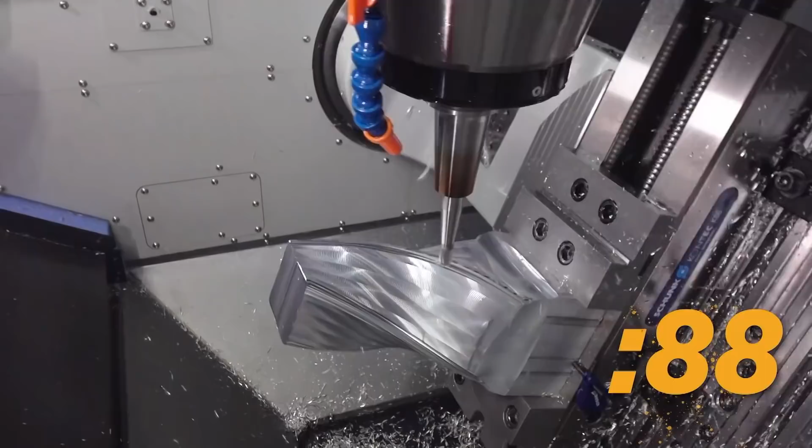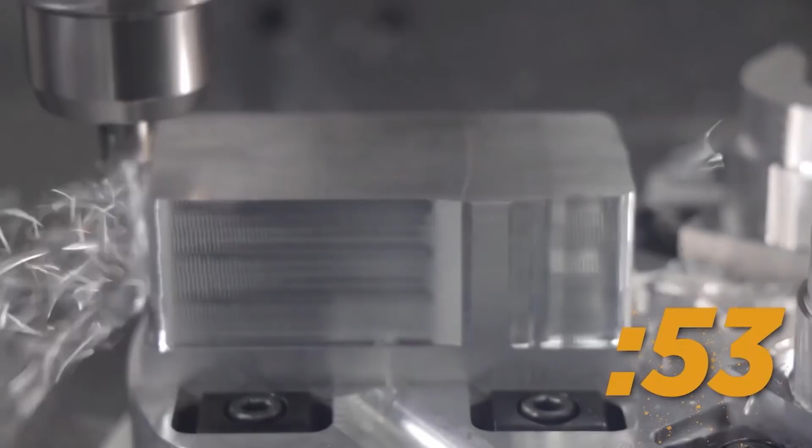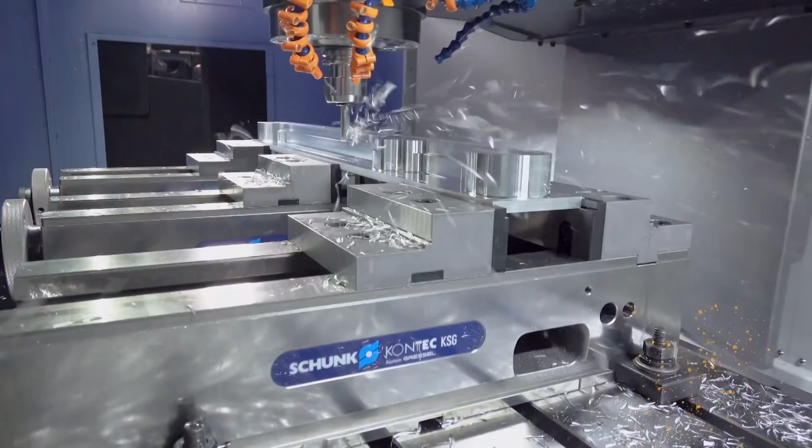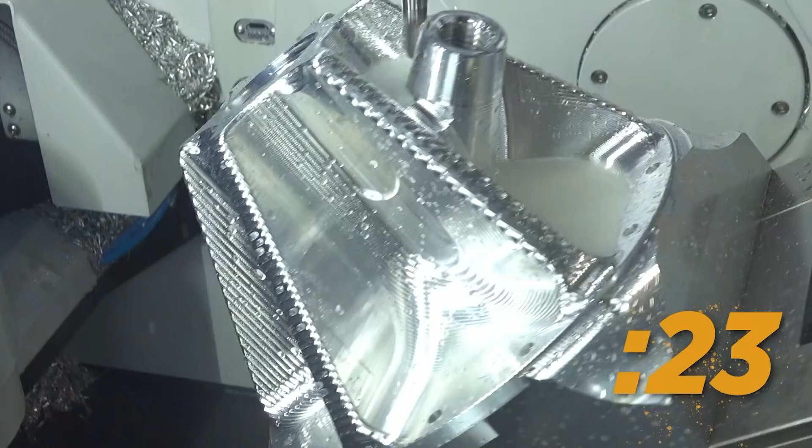Right here in Flower Mound, Texas, baby. Oh man, oh man. Boombastic. It's gonna be insane, all right? Woo! How's that cut? Boom. Had to go beast mode, right? Woohoo! It is Christmas. Beautiful. Crazy, right? Crazy, right? Beautiful. Crazy CNC machining. Crazy deal. Boom.

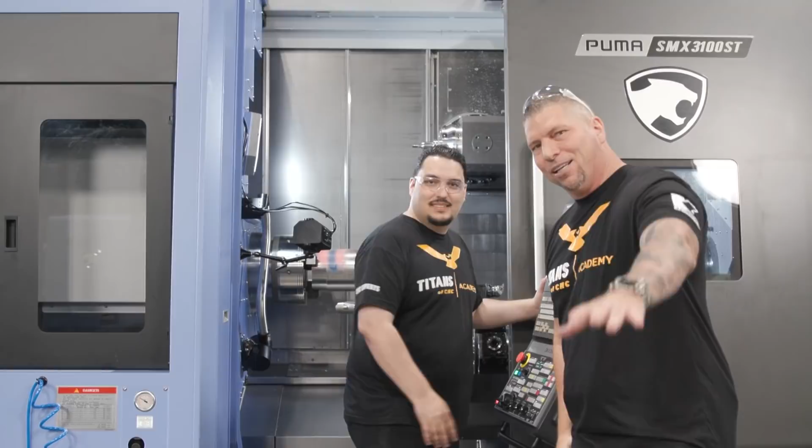What's up, everybody? My name is Titan Gilroy, and I'm excited to introduce you guys to BOOMBASTIC 2021. It's going to be an incredible show. Over the next 3 days, we're going to have 6 unique episodes, and we're going to have some crazy machining. Right here, we're standing in front of a big old mill turn. I got my son Tyson right here. Say hi to everybody. Hey, what's up? Boom. And Tyson is going to start off with that machining, and of course we're going big.

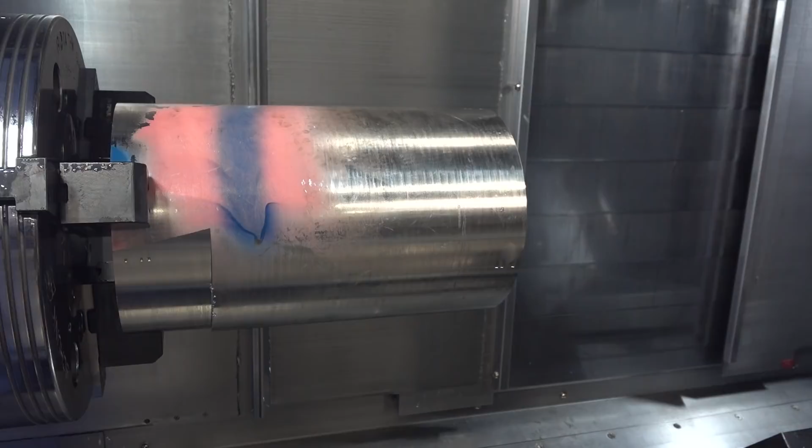We got a 140-pound piece of 316 stainless. We're going to take some big old drill. We're going to take it right through that material. We're going to pinch turn it, and we're going to create an amazing part on this machine, right? We got to go big in Texas, and guess what? We also have some amazing guests, leaders in this industry that's going to help take your skills to a whole nother level.

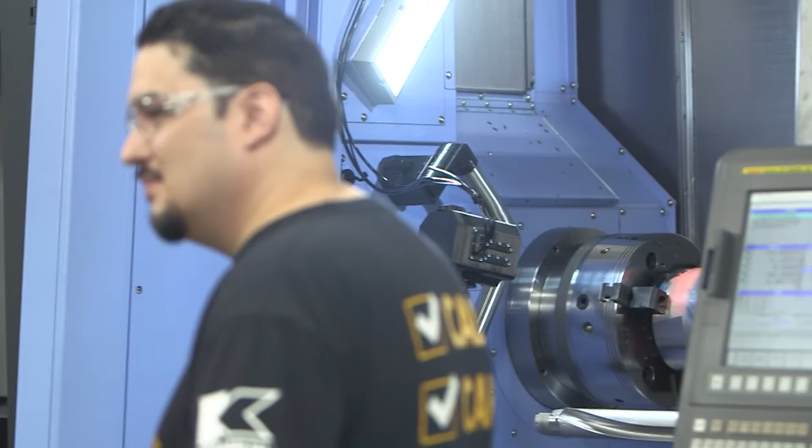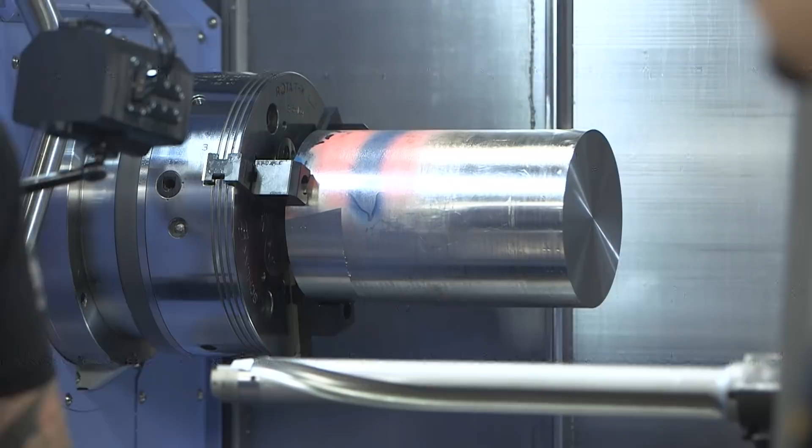And I'm gonna have a guest coming in to actually help us explain a little bit about the machine before we start actually machining. But stay tuned, because you see that drill right here? For context, look at my hand right here. That drill is about to go through that material right after we get done giving you the specs on the machine and talking about how brilliant this thing is. It's gonna be incredible, all right? So Tyson, I'll let you know when we're ready to go. All right. Oh, a little bit of pressure, a little bit of pressure.

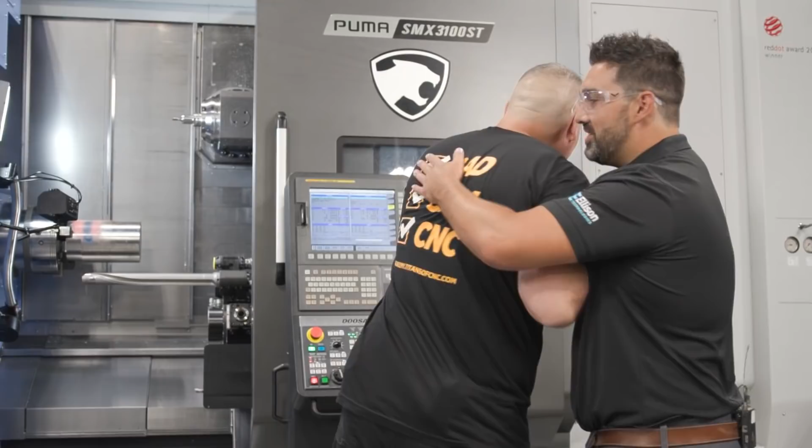All right, and you guys know from the last Boombastic, Mr. Chris Wood. What's up, brother? Hey, mate, how's it going? Good, man, good, good. Thanks for coming. Thanks for having me. Absolutely. So, brought in the expert over here on multi-axis, crazy 5-axis, 9-axis, you know it all, right? Well, not all, Titan, not all.

But no, honestly, today, this is a great machine, and you've talked about it, and the concept of done in one, removing the setups and removing the non-value-add labor from those setups, from those jobs. This type of platform is how you can do it. Cool. So you're solving problems for everybody out there.

Exactly. You talked about 9-axis, right? Everybody hears 3-axis mill, 2-axis lathe, maybe a 4-axis horizontal with the B-axis on there. Maybe then looking at 5-axis machines that we're going to talk about tomorrow and Thursday, right? But what makes it 9-axis? And then how on earth do you even program a 9-axis machine?

And shout out to Titan for doing that, because crazy. I can't do that. A little bit of pressure. No, just a little bit, right? Yeah, yeah. But anyway, let's just talk about the machine for a second here. Oh, just gonna jump in.

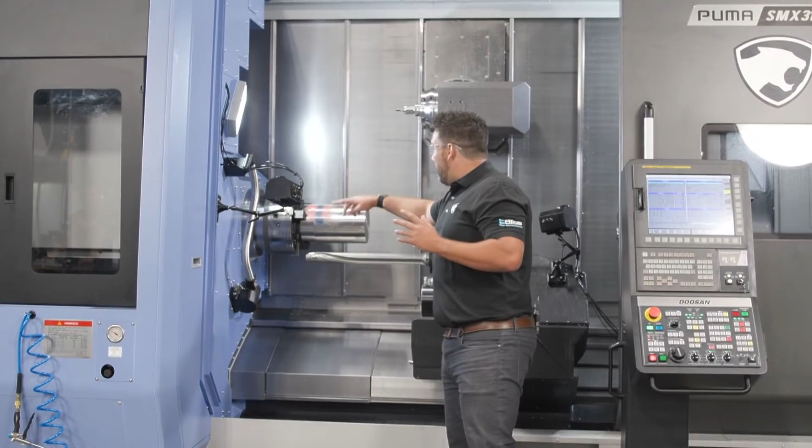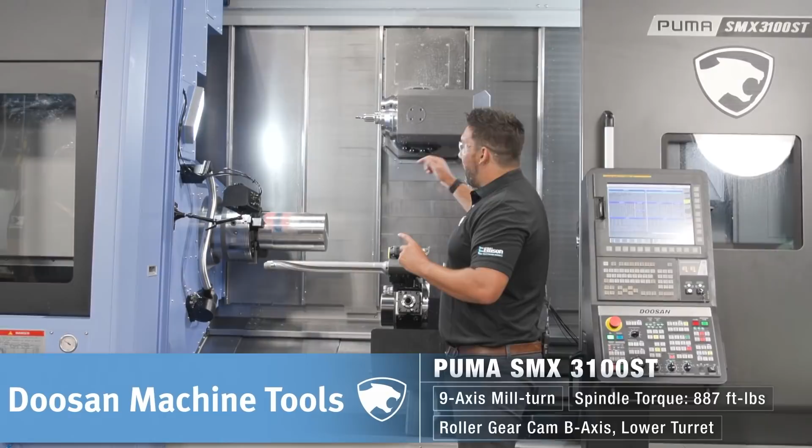So, as we're looking over here, we got a lathe spindle, okay? Regular C-axis lathe spindle, but 40 horsepower, 3,000 RPM, very powerful spindle. We've got another one on the sub side, so we can transfer that part over, take it from op 1 to op 2 in one hit. Then we've got our X-axis, and we've got a Z-axis, or Zed-axis if you're in another part of the world, going this way and going this way.

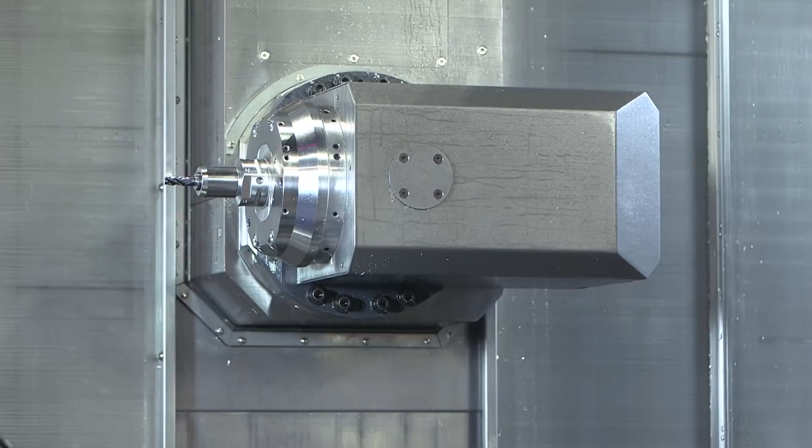And Titan was talking about this drill. That's going to use that axis and go all the way inside the machine. Then what's really cool is we've got a big Y-axis, about 11 inches, coming across the top of the part. So if you're using a 3-axis machine to create a surface or a hole or a boss or a pocket, you can use this Y-axis and come over the top of the part and create that as well.

What makes that special? This is a true milling spindle, 35 horsepower, 12,000 RPM. It's a real milling spindle that can remove real material. Not like the rinky-dinky little tool holders on live Y-axis lathes. They're phenomenal, but they're really not designed for heavy-duty continuous milling. This is exactly what this is for.

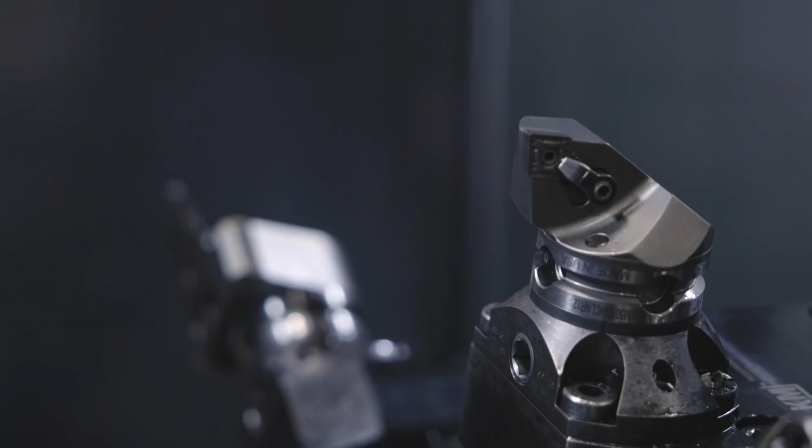Then down the bottom, we've got another turret that's going Z-axis, left and right. So we can do our drilling down here, and we can do turning, drilling over here. Titan, you talked about doing pinch turning, pinch milling. What is that exactly? That's when we're going to use our upper head and lower turret with 2 tools at once, coming in and removing material on both sides of the part. So you can do it faster. You can do a roughing pass and a finishing pass in one.

Here's what's really cool. Live tooling as well on the lower turret. So we could even do pinch milling. If you wanted a keyway on both sides of that part, you could come in and machine both sides.

Then what makes it real special, and this is also a 5-axis machine, right? Because we have a B-axis head up here. So by using that C-axis in conjunction with the B-axis, you're able to create 5-axis tool paths. It's a FANUC 31i controller, fully capable 5-axis controller. So you're able to use a combination of the two to make 5-axis cuts. So anyway, that's kind of an overview of what makes this special and 9-axis.

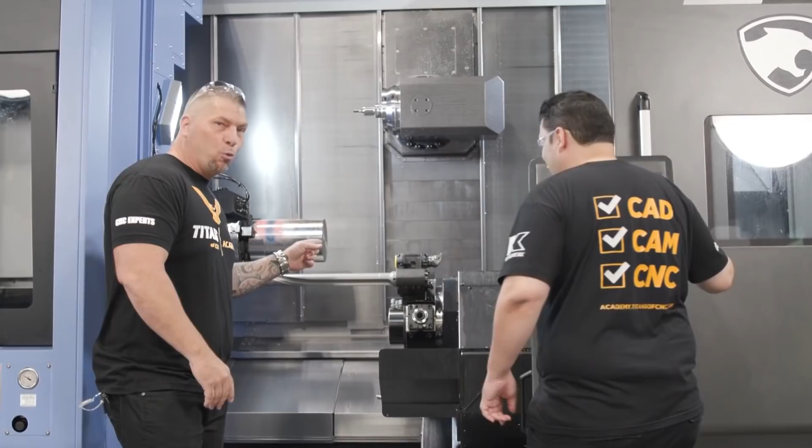So Titan, I'm gonna give you the floor. All right. And we got cameras inside the machine, so we're gonna cut to those cameras. And again, 316 stainless, big old Kennametal 2-inch drill going right through that part, all right? Now, let me just switch up real quick, and before we shut the door, I wanna talk about work holding, all right?

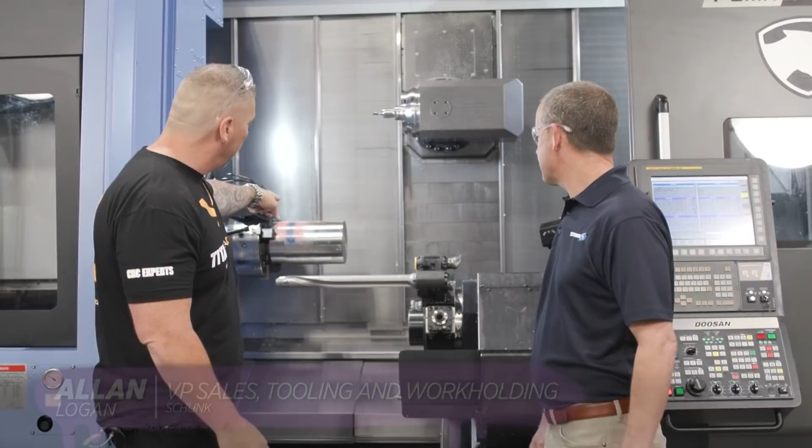So I actually have Allan from Schunk over here. Allan, come on in here. Let's jump in. That way they can see with the door open real quick. Absolutely. All right, so this is Allan. He's from Schunk. Schunk, of course, is one of the greatest work holding companies in the history of the world. Big aerospace companies, medical companies, everybody uses them when it comes to automation, when it comes to education and advanced machining, period. And if you're gonna hold a 140-pound piece of stainless in a chuck, you wanna go with Schunk, right?

Yeah, you better hold it securely, and one of the ways we do that is with our THW quick change jaw chuck. I mean, 35,000 pounds of clamping force. We also have our claw jaws. These are our Impact Series claw jaws, which is actually gripping the part. So this is really important. It's not the chuck that's clamping the part, touching the part, it's the claw jaws. And they're always touching the part. Really the only tool in the machine that does that. So super excited about what's getting ready to happen.

You know, one of the other things I think about when I see this beautiful Doosan machine is the technology. And with technology comes flexibility. And with flexibility, like Chris was describing, the milling, the turning, the drilling, all the capabilities you can do in one machine, taking multiple machines, putting it into one, making multiple families of parts on one machine quickly. One way you can do that is by having modular quick change tooling from Kennametal. Fantastic product, right? Allows our customers to quickly change over from job to job.

But what we don't want to forget about is the opportunity to also capitalize on the quick change function on the other side of the part. So that would be where the THW quick jaw change chuck comes into play. So with this chuck, you can go from one part size to another by simply turning a key, removing the jaw, getting your other set of jaws, putting them in, and you're ready to rock and roll. So you can go from roughing to finishing as well. You can go from roughing like we're getting ready to do right here. We're getting ready to take a big bite, and we're gonna hold not with friction, we're gonna hold mechanically with the claw jaws.

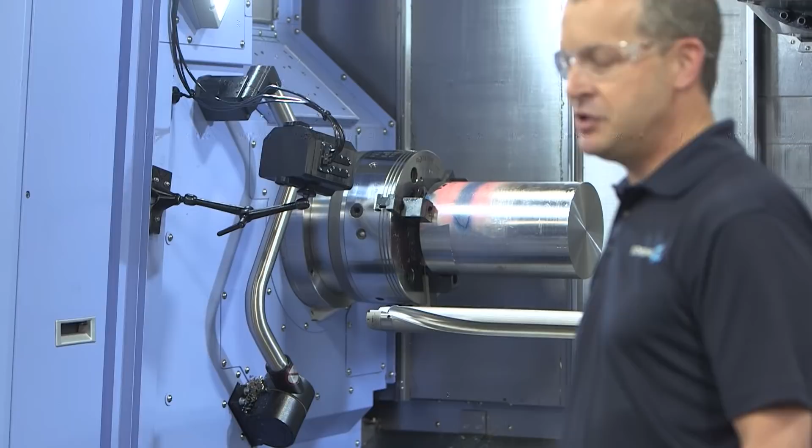So let's say we wanted to flip the part around and finish. Well, we pop out our roughing Impact Series claw jaws, known in this shop as beast jaws. Oh. Yeah. And then we put in our soft jaws, right? We turn them once, and most times we can go from roughing to finishing, back to roughing, back to finishing without even boring our jaws. Awesome, that's amazing.

One thing I want to add to that is, I just want to stress the fact, there's a lot of great machinists out there that would look at this setup and they'd be like, you don't have a steady rest. You don't have a center on it. You don't have another chuck coming in. It's hanging out of those jaws. And if you didn't have claw jaws, we could not do this. That is imperative, you guys need to know that.

The claws, as Alan said, they literally dig into the material. And since we understand the part, that it's not gonna affect the part that we're actually making, we love that it just digs in right there. You're gonna see a tiny little bit of wobble because it's not like you can just take a hammer and pop that thing in straight. But you know what? It's a beast setup, beast jaws.

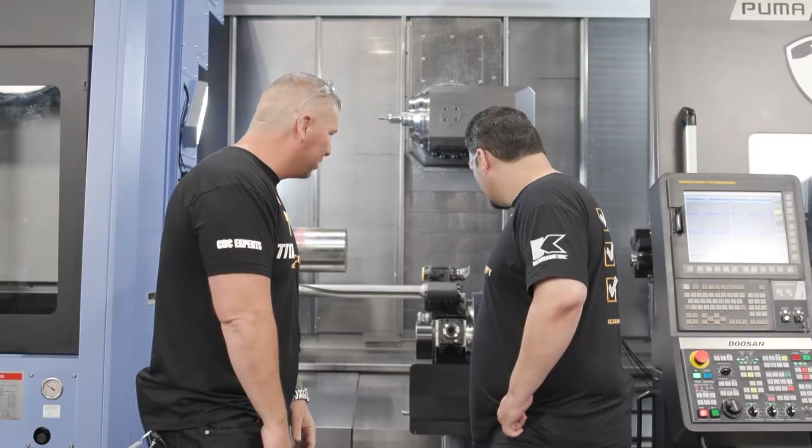Oh, all right, now, dun, dun, dun. Tyson, what's up, baby? All right, so I'm gonna actually step back and, Tice, I'm just gonna give it to you. Of course, you've never seen this live on camera, taking big cuts like this. And I'm just gonna shut up and walk away, all right? Can I close the door and push the A button? A little bit of pressure.

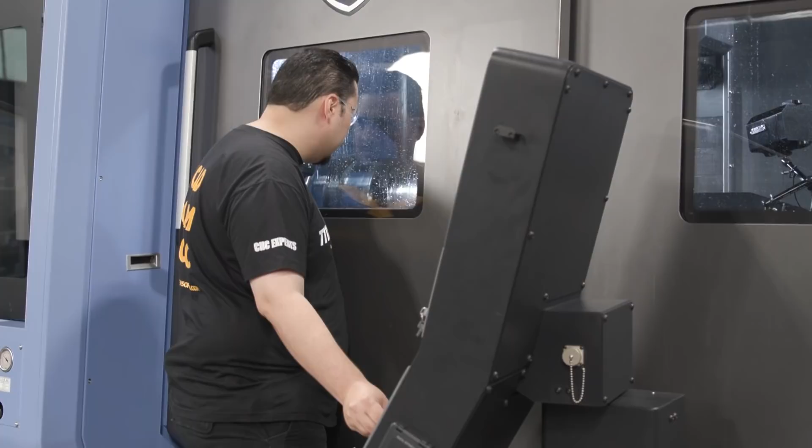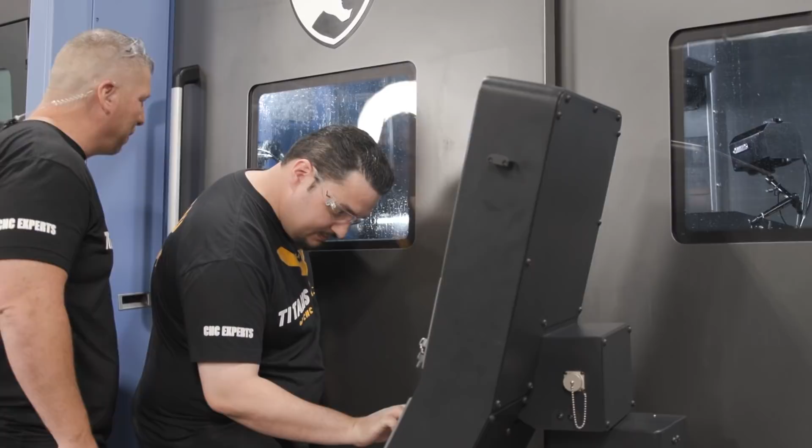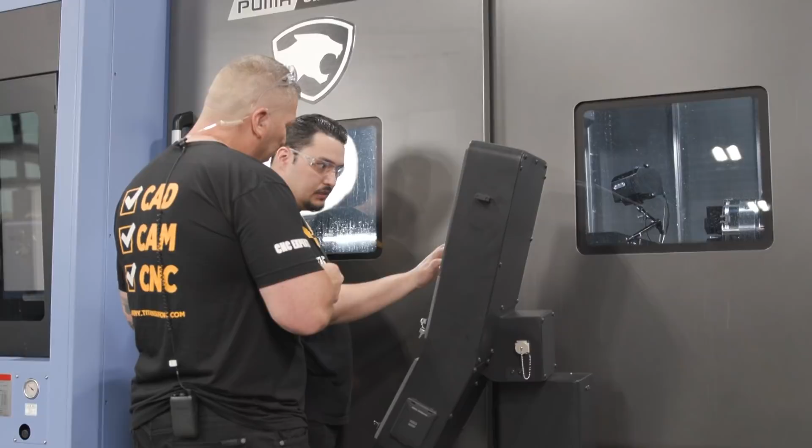It's the load alarm. Back out. Boom. All right, all right. You know, I'm gonna actually go to Scott Deviney from Kennametal. Scott, are you there? Hey, I'm here, Titan. Hey, what's up, Scott? I'm just talking to my son real quick, give me one second. So just relax and we'll just pull it out nice and gentle. Back it off just a hair, fix it, and then we'll go ahead and go in. Okay? It's not letting me clear the alarm though. It's cool. Where's Chris at?

All right. Boom, so it's a 2-inch drill. We actually used that 2-inch drill and made a part already and it was amazing. But right now we have a little bit of a load problem inside that part right there. So Tyson is going to stop the alarm. We're gonna pull it out. We're gonna make an adjustment because that's what you do.

And that is the brilliance of CNC machining live on camera: let's actually take a look at the material, the tool, the relationship, and work together to solve that problem and then continue moving forward, boom, boom, boom, making it happen. Not boom in the machine, but you know what I'm talking about.

So Scott, what's up, brother? Can you hear me? Yeah, I hear you, Titan. Awesome, man. So we're on the machine, and we had a little bit of a load on there, so we're solving that problem right now. So you want to explain a little bit about the drill? Yeah, sure. I see the drill Tyson has there is a KSEM Plus, and it's a 2-inch diameter, 8 times D drilling body. He's going through stainless steel there, so I can see where you can pull some loads on that drill. And we're always pushing the envelope on our calls, Titan.

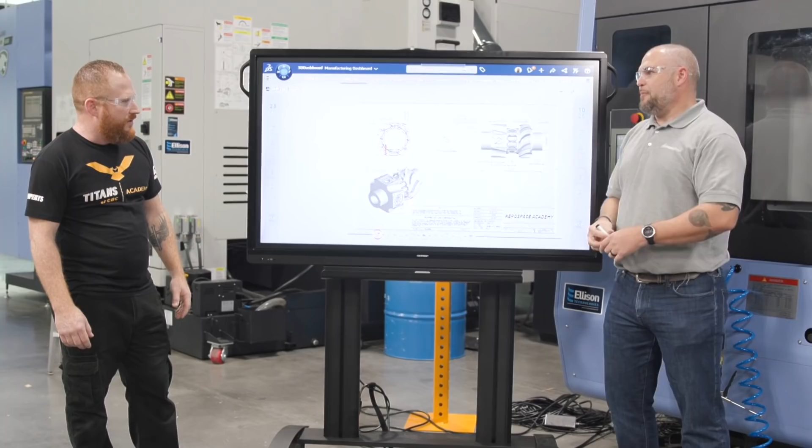And then we can even go one step further. If we opened up this drawing we're looking at here, we're having an issue with that hole. We can mark that up and tag it, send a screenshot, and show everyone where that problem's at, because how I explain it versus how you explain it might be a little bit different. And then this is all saved. So now that we've experienced this issue and solved it, that's all documented. So when I have to make this part again, say in 6 months or a year, we can look back on it.

Yeah, I mean, that's the biggest problem we have with manufacturing, right? Is the communication and how do we duplicate success over and over and over. When you look at processes, a lot of money is wasted in the time it goes from engineering and I get the order to the time I turn the spindle on, right? That's sort of the Wild West these days. So collaborating all of that together and putting everyone in to have the same ideas is really a path to success.

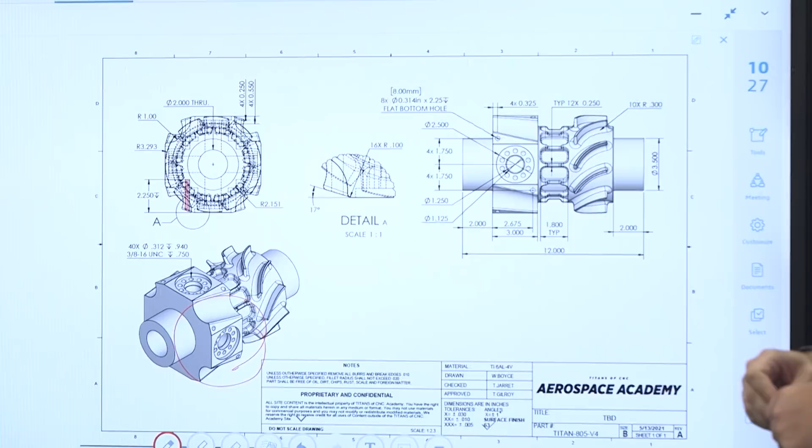That's another thing, right? Manufacturing and your engineers. And I've heard stories where manufacturers say, hey, if we did this, can we change this design on this part? It would save you money and it's going to save us machine time. And that platform is a good way to maybe connect our manufacturers with the engineers, with our customer. Yeah. There's the old adage of a machinist can look at a part and be like, yeah, no, can't make that. And the engineer's like, well, why? And then there's this whole discussion about it, right?

Where here we could have a part, we can look at it, we can zoom in, we can section it, we can highlight and mark up those areas and really talk about why it's cool to model the chamfer there, but maybe from a programming perspective, it's not best to have it in the geometry, right? Yeah, of course. So what other features are available on this? So there's some really cool features that go to it. Obviously, there's measure, markup. We can do a section on here, and we can interrogate the part, right? That's just like the cross section when I was using SolidWorks to model the part, right?

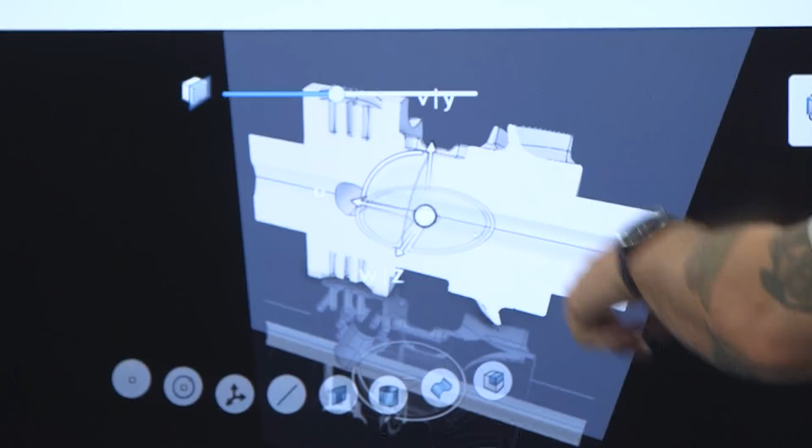Yeah. So if you look at sections here, one of my famous parts that I've seen in the past is somebody puts the 30 thousandths hole 8 inches deep, and they can't figure out why it costs so much. So if we come in here, I'll zoom it in a little bit. We can actually go through and interrogate and see what that is, and we can do measurement, and then we can save it, mark up, screenshot. Again, if we go to here, we can type in, either on a keyboard or if you like my rough sketching, I can go ahead and create that as an action.

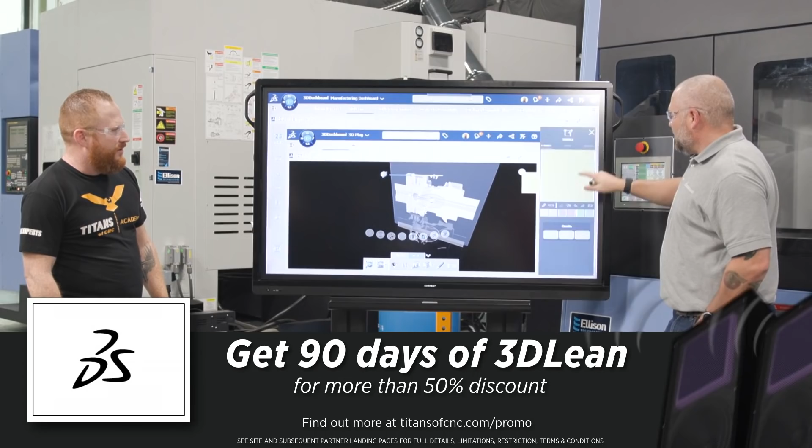And then what's even more interesting about it is if we go out to our traceability, so I'll back up a couple boards here, I can now assign which day of the week it needs to go to. And if it's going to engineering, let's say they need to make an engineering change on it, I can actually send that to a task for them to see what the problem is, understand what the problem is, but then it's also traceable to everywhere else, including ERP, MES systems. So if we look at scheduling, it's all right here. It's one place to go for everything that happens throughout the manufacturing process.

So would this be more for maybe long-term planning or just the short-term day-to-day operations? So if you look at Lean Team Player and 3D Lean, it's more that day-to-day, like we're solving a problem right now, right? If you look at long-term planning, like I have a bigger project, then in the 3D Experience platform, we can do long-term project planning with Project Planner. There's an enormous amount of roles that you have access to, so you really get to choose your own adventure, which is awesome because no two manufacturing companies are the same, right?

Yeah. So would this be better for the small job shop, or is it also tuned in for a huge production facility that's doing crazy aerospace or automotive? So actually all of this started at the biggest of the big, right? We've been developing this for a long, long time. It's in use by the biggest companies. But with the SolidWorks market and everything that we do, more in that mainstream, a lot of this technology is now made available for the average person to have access to, right? Because everybody needs to be successful, not just the biggest of the big, right? Yeah. So it's a good fit for all of those. Oh, that's awesome.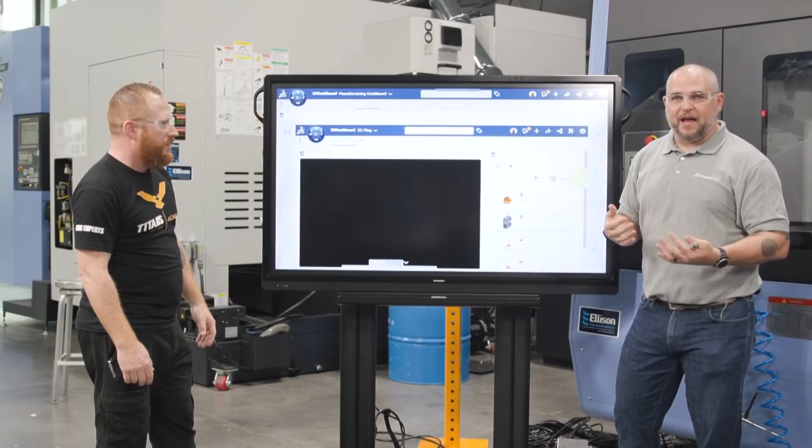If we're talking more like project planning, manufacturing, those types of things, then we'll pick this dashboard. The cool thing about these dashboards is they can be whatever you want them to be. So this is mine from my years of being in the quote unquote real world. So you can see it here as an example. Here's a library of parts that I'm working on.

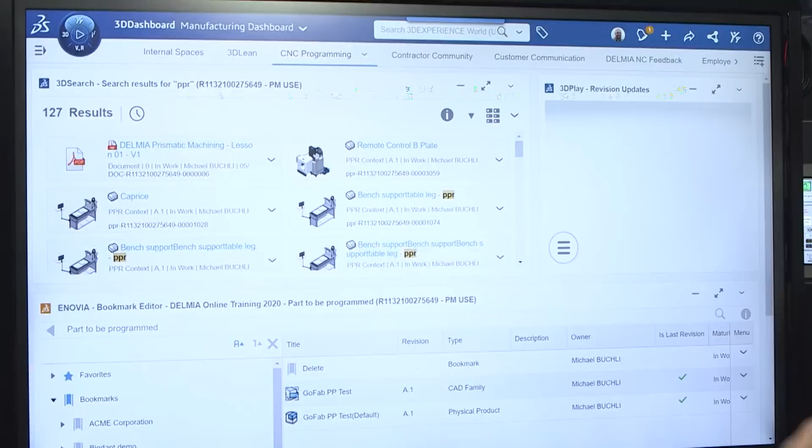Here's my bookmarks for things that I need to program, get it done. And then if I want to look at anything, I have a viewer here to collaborate with. So if I did something that the student needs to see, I can drop it into workflow, and then I can simply just click on it, and there's an option to share, and away it goes. Oh man, that's awesome.

Hey man. Hey, I want to get through this drill real quick. Yeah. And then I'll call you guys right back and we'll finish up. Yeah, no problem. There you go.

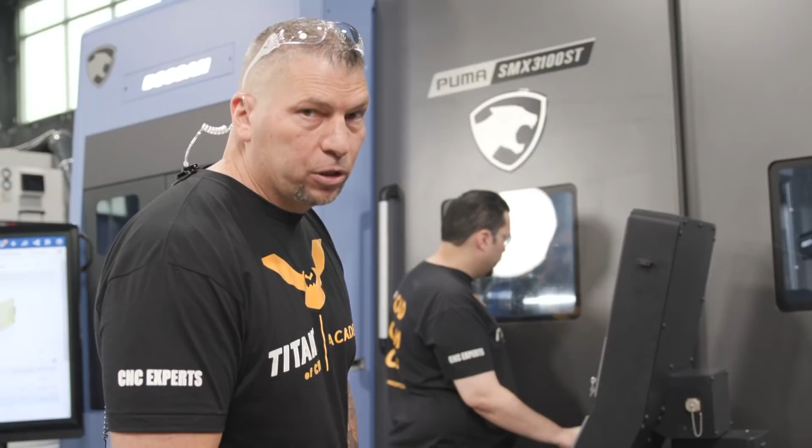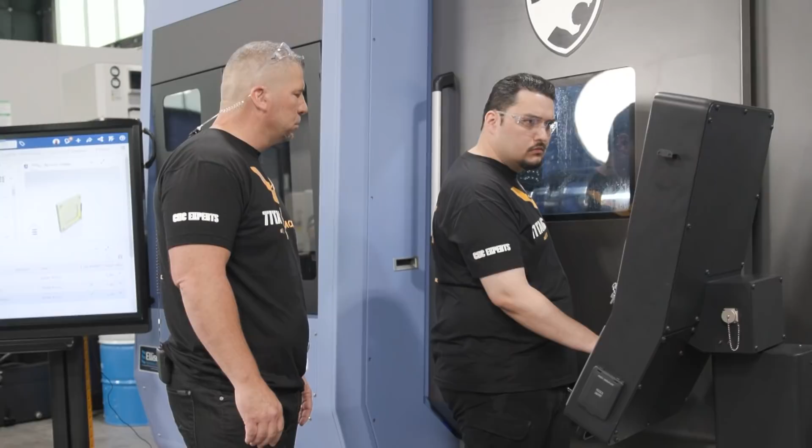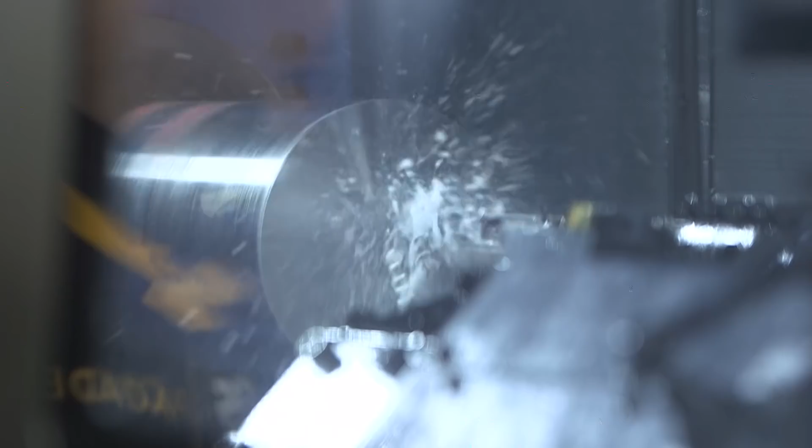That's 3.5, 4 inches now inside with the 2-inch. Five and a half inches inside. All good, man. Chip's not breaking how I'd like it, but the load's staying where it's supposed to be. You got it right about 100%.

So, making multiple parts. So our load right here is right about 100%. We're a little bit over, all right? So we just got a fault, okay? And then we cleared it, made sure that we weren't making any mistakes, and we're right back in on it. So we were trying to run a higher feed rate to break the chip, but that's kicking it too much over the load. Exactly.

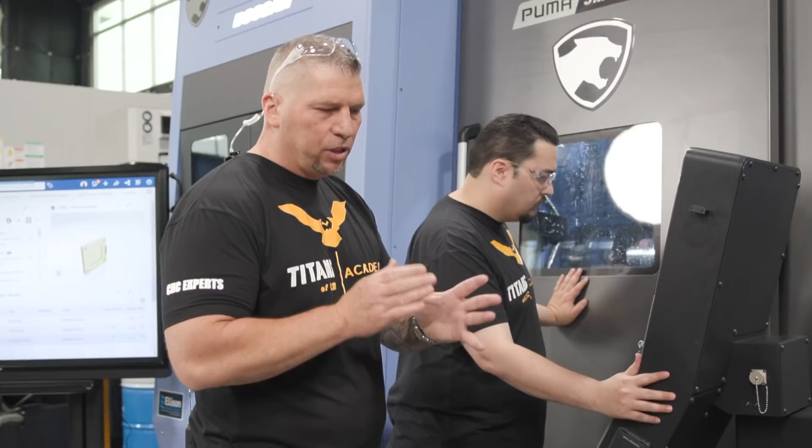So this is one of those cases where the Kennametal tool is so free cutting, you need a big feed on it. So we could actually maybe drop down the surface foot a little bit and actually increase the inches per rev on it, but you need that feed, and that's gonna break that chip. But it's all good. It's a big drill. Nine inches in.

Eleven inches in. Keep on there, keep on. So good. Oh, man. Dude, give me a hug, man. Give me a hug, man.

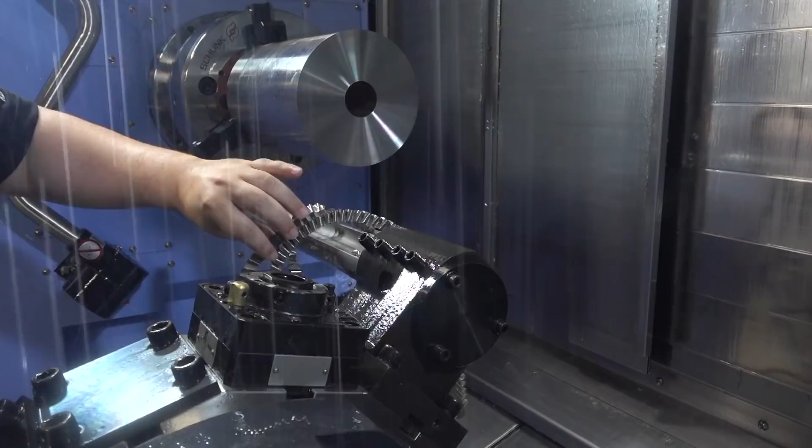So good, so good. I was talking to you guys before, and I'm telling you, in life, you're gonna hit a wall. And in manufacturing, you're gonna hit a wall. You're doing impossible parts. You're taking on crazy projects, you know? But you gotta be cool under pressure. And look at us, we're live on camera in front of the world. There's gonna be hundreds of thousands, millions of people seeing this. There's a little bit of pressure, but I live for that.

I live for that. I always sold myself to companies, the biggest aerospace companies, and said, you know what, you deliver that part, you give us that opportunity, we will make it perfect. We will drive down at 2 in the morning and have that to you by 6 a.m. with perfect finishes. You don't have to worry about that quality, right?

You gotta live for that challenge right there. And Tyson, you know, we came in, we hit a load on camera, and we just stayed cool. There was no way we were gonna turn this camera off and fail. We solved the problem, brought in other people, created some distance, and we finished that cut. And with that, I just want to bring it up. Oh, my man, look at this.

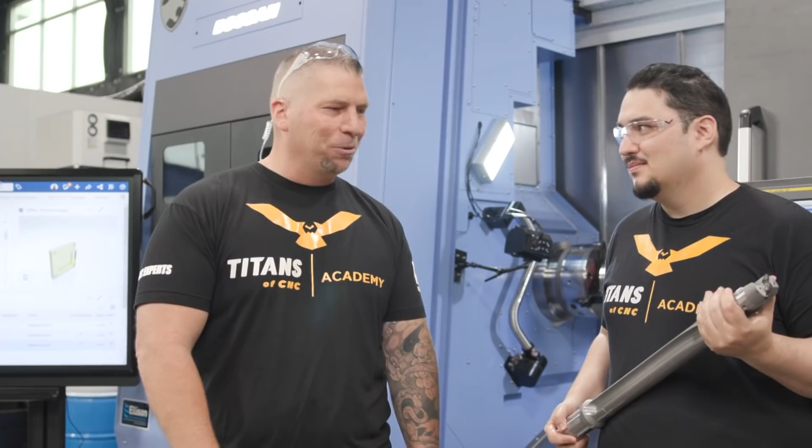Like, think about it. You go to these big tool shows. They're air cutting. We want to do something different. We want to teach this trade. We want to lift you guys up, and we want to show you what legit manufacturing is, and things are possible, so you guys can make that money. That's what we're pushing through the material right there.

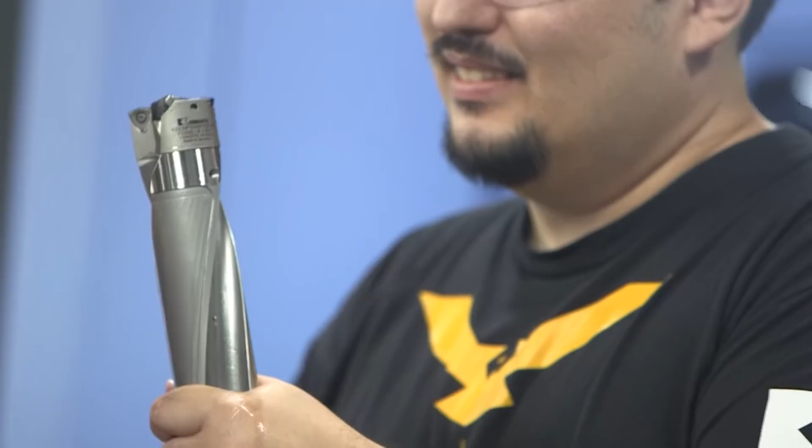That guy right there. And you can see the part didn't move at all. How's the inserts? Still good. Inserts are great. Look at that bad boy. Boom. Amazing. You can keep going. You make adjustments. You keep moving. All right. And with that, happily, Tyson. Way to stay cool. Way to solve that problem.

Yeah. This was just a different fault alarm, and we don't have a huge amount of experience with the machine, so we ended up turning it off, backing it out. But before we turned it off, we wanted to make sure that we could back it straight out. So we just took a little bit of time, and thank you to Ellison and Doosan. They were actually here, gave us some good pointers. So thank you guys.

Can I bring in Scott? Yeah, I'm here, Titan. Awesome, Scott. What's up, brother? Go ahead and get ready to keep machining. Yep. A little bit of pressure, huh? Oh yeah, well, always, right? I mean, when you're pushing the envelope. Yeah.

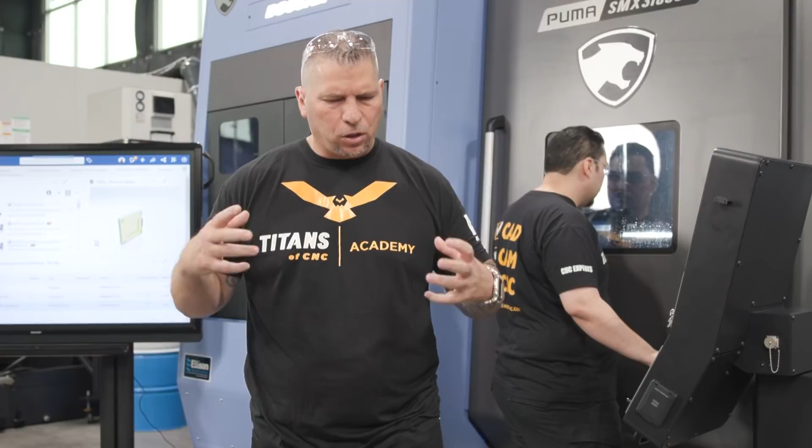But you know what? We wanted to go big, and those Kennametal inserts are looking good. The tool was amazing. The machine held out, the jaws, everything was rock solid. It was super good, cool under pressure, because you got confidence. So now we're gonna actually get into some pinch turning and some milling, and we're gonna continue this process to make this incredible part complete.

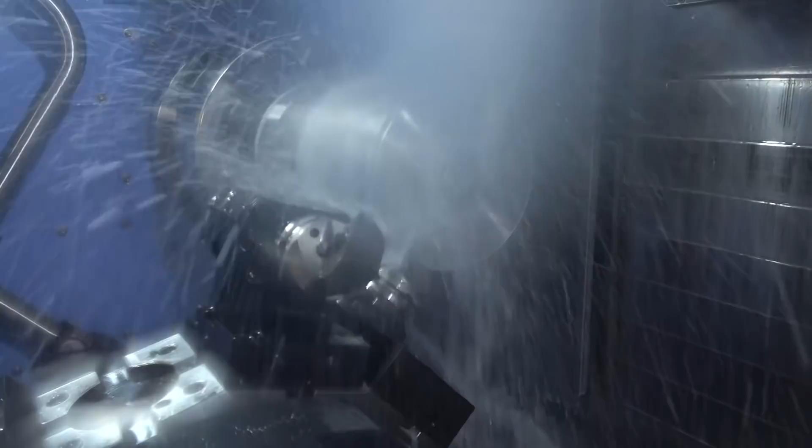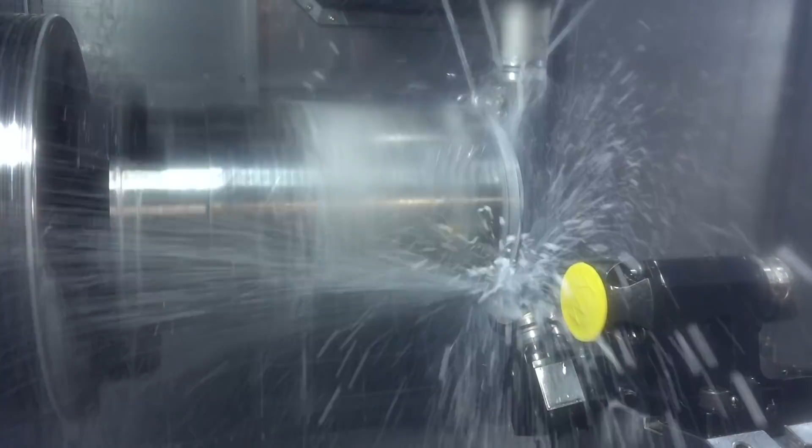We can actually go to inside the machine. So now you can see there's a wobble, but no problem. We know what's going on. As Chris Wood mentioned earlier, we're using the top spindle and the lower turret, and we're pinch turning this. That means if we're taking 100 thousandths to cut normally with one tool, we're taking 100 thousandths on the bottom and 100 thousandths on the top, so it's 200 thousandths, so it's double,

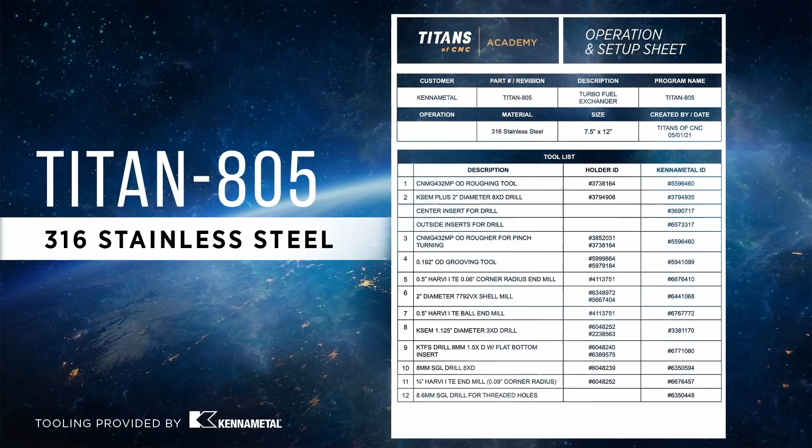and we're basically turning the whole thing, which again, the whole machine saves you money, and this technique saves you money. Coming to YouTube, we're gonna have all the speeds and feeds, all the depths of cuts, all the tools for the entire part. We're gonna machine it complete, and we're gonna show all of that. Boom, beautiful cut right there.

So Scott, you wanna talk a little bit about these turning tools? Yeah, Tyson's got some KCM 25B inserts from Kennametal, that's our high performance grade for stainless steels. The 25 on there, that's like an ISO standard, middle of the road between toughness and hardness on the insert. A KCM 10 would be a harder insert, more for finishing, smooth cuts. The 25 is more medium machining to roughing.

And then we have a KCM 40, which is a real tough insert that you can use for heavily interrupted cuts, again, specific for stainless. But I love that pinch turning. Like you said, it's a big time saver. In the same amount of time where you'd only take maybe 200 off the diameter, you're doubling that in the same cycle time. So that's really nice. That's awesome.

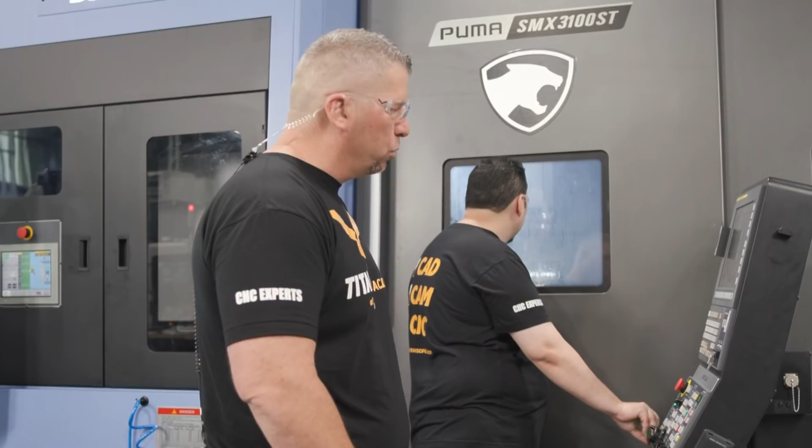Oh, look at that cut.

One more cut. So we're gonna actually machine this part throughout the day, and we're gonna come back live later in the afternoon, and it's gonna be in a different form, and then we're gonna basically show the cutting at that level of where we're at, all right?

I wanna say something real quick. We have the greatest community in the history of the world, like mom and pop shops, big production companies, big OEMs and aerospace companies, medical companies, hardworking men and women all over the world that tune in to Titans of CNC to learn from us and to be in community with us. One of the cool things about our academy is it's like church, right? We have small groups happening, and you can learn about it in Titans of CNC. Go to resources, small groups, where machine shops become a small group and they teach people using our free curriculum. And now a lot of them use the Doosan, the Lynx lathe and the DNM, a crazy education deal from Doosan, and they teach the industry to anybody that wants to learn.

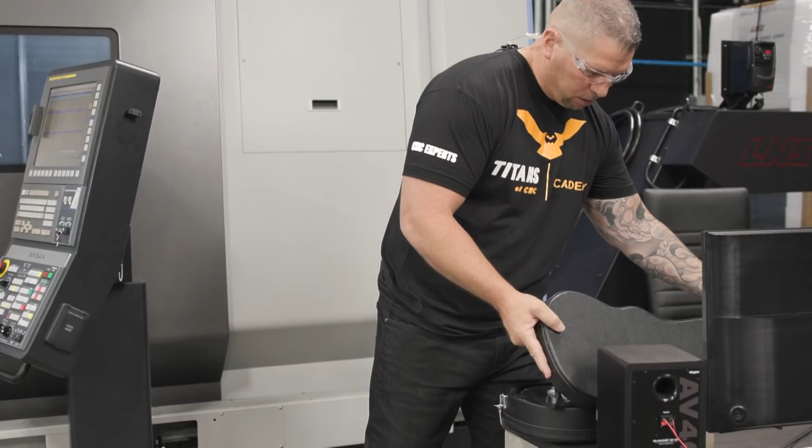And that's the blessing of what I do, I get to talk to people all over the world. I've had many phone calls with this gentleman about his company and his goals and his life and different things. And we're friends. Well, I want to show you something that almost brings a tear to my eye, because Alex Loper just sent me a package. I'll take it out. You already know what it is. This is the talent of Alex. Loper Machine, by the way.

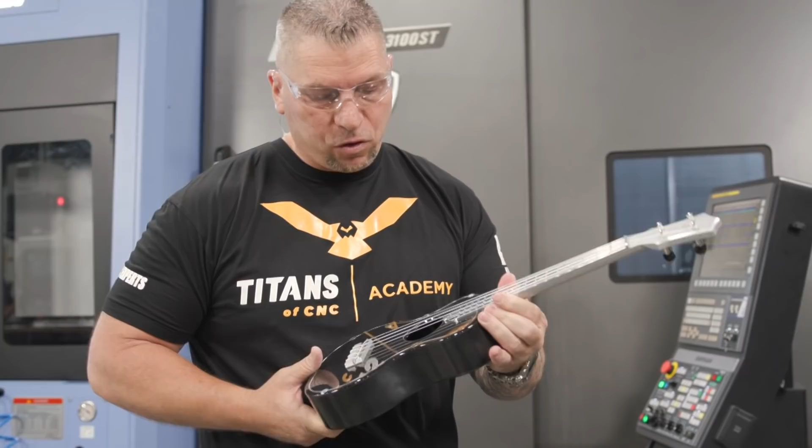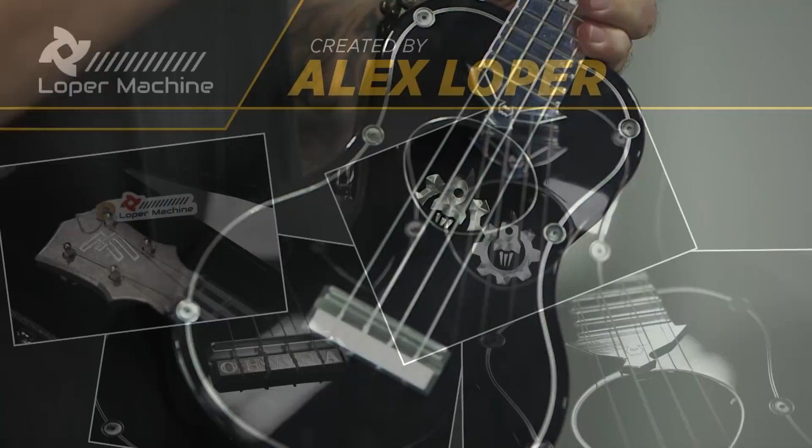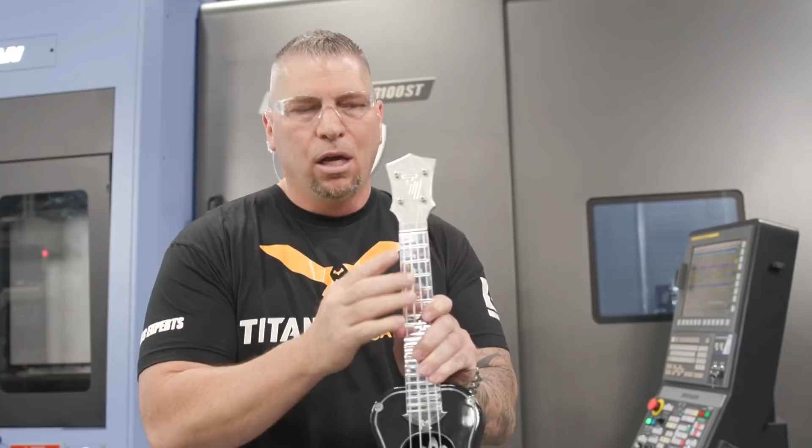Alex machined this ukulele for my children. This is all machined right here. And if you look really close, you can see the eagle right there? That's the logo. Over here it says Ohana. My kids, I have an amazing story where me and my wife were given their names before they were even conceived, Nathaniel and Gabrielle, and then my kids were born on 7/7, twins on 7/7. He knows the story because I share my life with the community. 7/7 right there for my children. And my daughter Gabby takes ukulele lessons, and I'm just humbled, man.

Thank you very much. Thank you for what you do, and thank you for all of the Academy small groups and all of the shops out there that are teaching the trade. We're giving you guys all the free curriculum so you can do in-house training.

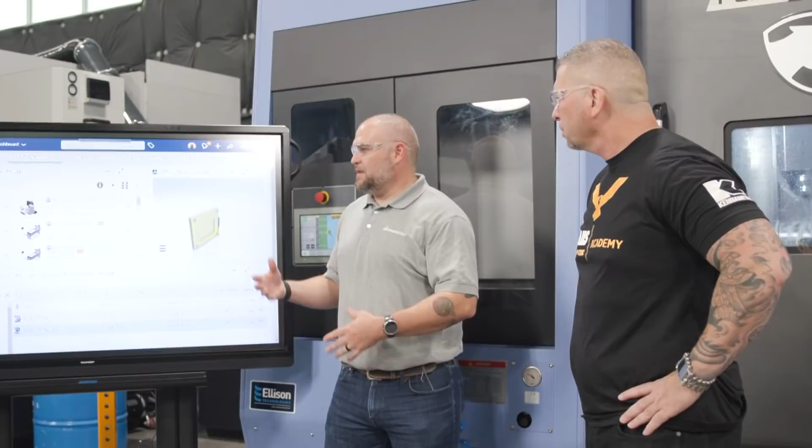Do you feel like you got anything else you want to talk about on this real quick? I think the only thing in summary, for the average machine shop, why it's important is this is all cloud-based and secure, right? So you don't have to have the IT overhead. You don't have to have all those struggles that you may have experienced in the past trying to communicate and connect. Yeah. So that's probably the most important thing, it's all about communication.

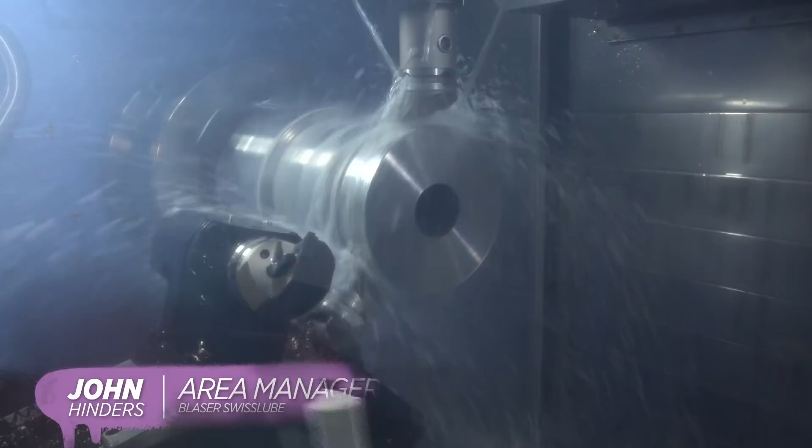Big props, brother. So, Synergy 735, you can see your part. You guys know I'm a fan. You don't smell it, you see it. You can machine 316, aluminum, doesn't mark your parts. Inconel, titanium, Monel. You guys have seen, we've used it. Anything you want to say to it?

It's our #1 selling product in the United States. More than likely, Titan had a huge amount of influence on that, and we continue to see great success with it. It's kind of a game changer for guys who've been in the business for a long time. Some people don't believe it can be that much better, but it is. It speaks for itself. We're a large company. For it to be our #1 selling product, it speaks for itself.

It's the whole tech, awesome. The whole aspect of cooling is just... You walk in a machine shop now that runs the Synergy, and the owners say, "My shop doesn't smell like a shop anymore." And for you who've been doing this for a long time, most machine shops have a distinct odor to them, some worse than others.

And that's one of the beauties of this thing. And plus the tool performance, no foaming. You can actually see the part, which is pretty unusual. Machinists like to see what's going on. Like Titan says, milk, there's no milk anymore. Product lasts a long time. We've got it 2 or 3 years. No smell, odors at all, easy to maintain, easy on the skin. Machine tool, it doesn't attack the paint, seals or switches, any of that kind of stuff like coolants have in the past.

If I had a shop, and I guess everybody would expect me to say this is what I'd run, and I've been with Blaser for a long time, but it is a winner by far. A great product. Amazing. You know, I want to say something, and that is that Blaser never came to me and said, "Hey, Titan, we want you to represent Synergy 735." My son actually worked at a shop, and he said they were doing a beta test on a clear coolant for Blaser. Yep. I use Blaser.